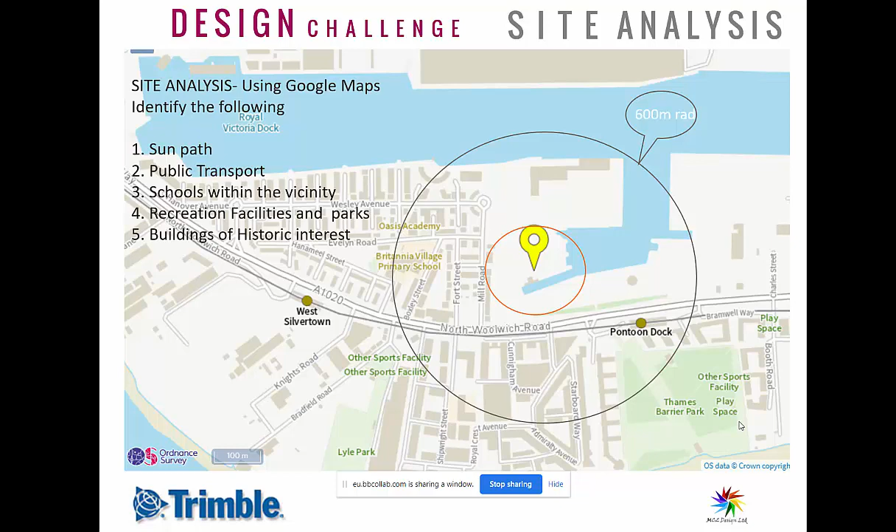Once we have those kinds of things, we can then start to look at the site in a little bit more detail. The site itself is somewhere in the region of about 2.5 hectares.

What happens at the moment is that within the site itself, we have the existing Silo D building. We have a canal that feeds that Silo D, and there are a series of access roads and paths within the site itself. So from the color coding on the screen, we've actually divided this up into 4 clear areas: site A, site B, C, and D.

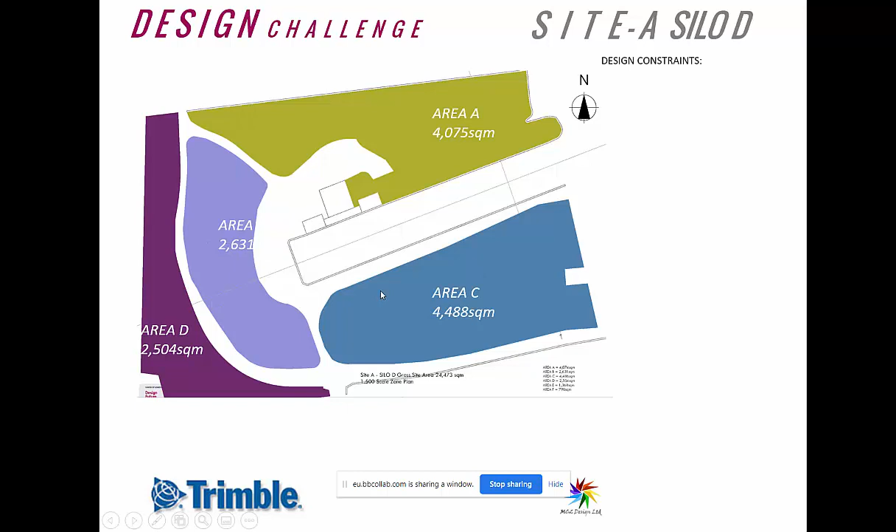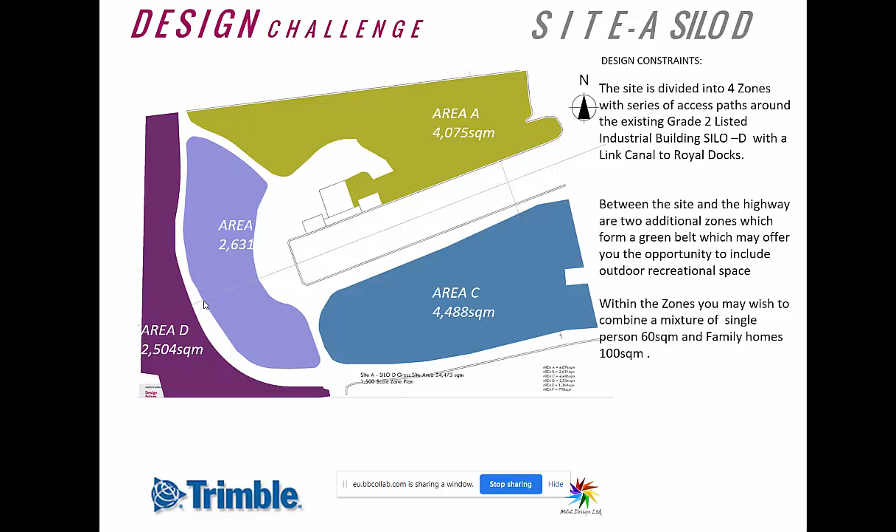Within each of those 4 zones, we do have the canal, and to the south of the site we actually have a highway. Now the issue is that because of the embankment between the site and the road itself, we need to consider how we will actually access the road when we start developing the site for our housing scheme.

But there are criteria of things that we need to think of. First of all, we need to establish what is the size of the homes that we need to put on the site itself. If we're looking at a design for a single person, we'll want to be looking at somewhere in the region of about 60 square meters. And for a small family home, we want to be looking at a minimum of 100 square meters.

When we're planning out the site itself, we need to think about not filling the site with buildings. We need to consider that only 25% of the surface area is going to be used for housing. The rest is going to be used for access roads, green spaces, and spaces that we can use within the community.

But probably the most important thing we need to think about is that this site is right next to the water, so we need to consider what's going to happen when we build this site regarding flooding, and the safety of the community that are going to live there.

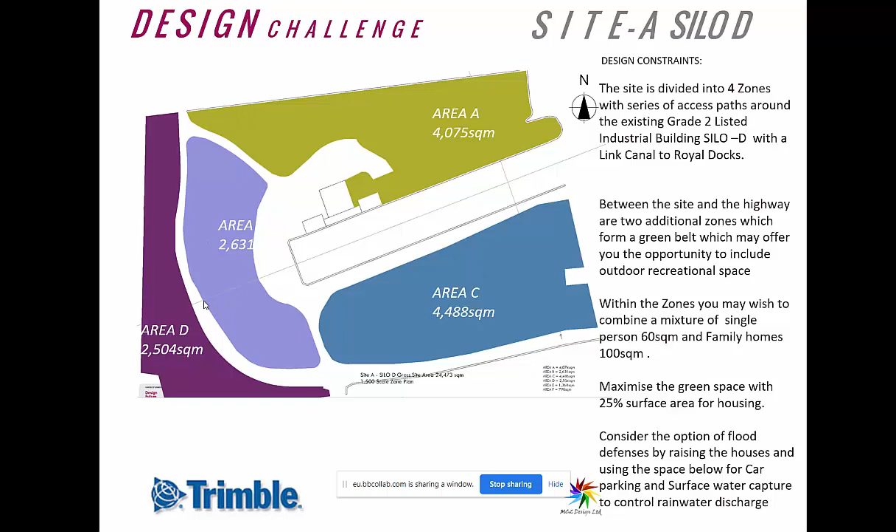Analysis of flood risks is available by going onto Thames Waterside. You can pull up an analysis, and it highlights exactly where the area of flooding is going to be.

Consequently, when we're looking at the flood risk, there are areas which are identified where flooding will rise. Now, at the moment, I think the current plan for flooding is about 30 years, and they are considering flooding rising up to 3 meters.

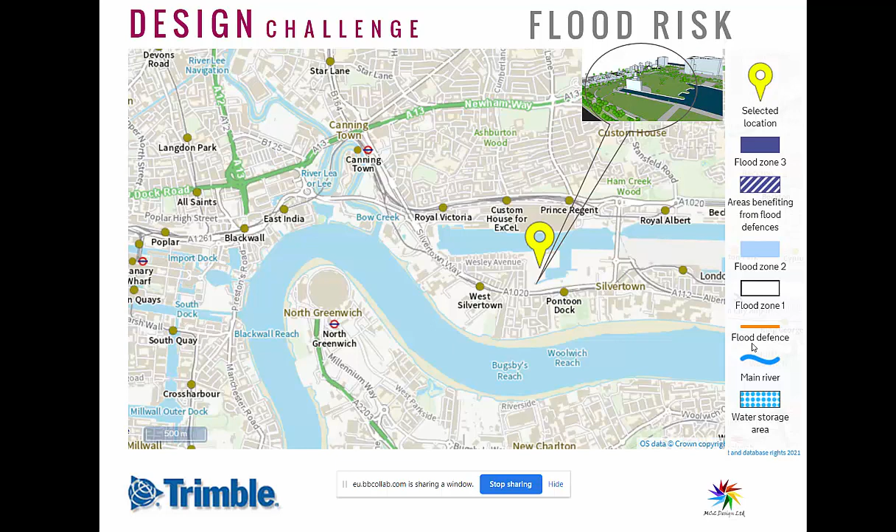One of the other things we need to consider is during the build phase of the site, how can we minimize the impact on the environment, particularly regarding construction vehicles coming to the site. Along here is the DLR, and here is the main road. Between the road and the site itself there is quite a high embankment, so it's not feasible to cut a hole there and bring site vehicles from the road. The only option is to bring it up this road and in from the north of the site.

That's one option. The other option we consider is building a temporary factory on the site, and then using a barge where all the components can be brought to site and assembled. This gives us a sustainable rationale where we can use modern methods of construction to achieve the outcomes for our site.

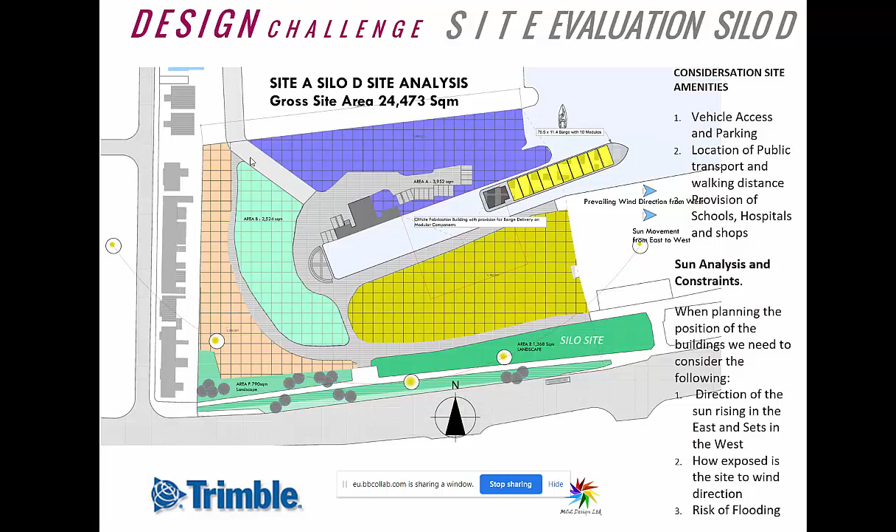The good thing about this site is that it's not an exposed site. As far as wind, a lot of you will have experienced high winds over the last two months, particularly in London last week. The vast majority of our wind comes from the west - probably around 75% - so everything comes from this side. Wind from the south tends to be warmer, and from the north tends to be colder. So we need to think about the orientation of our buildings and exactly where they will be positioned when siting them on the site.

We can use the ground and so we might consider building up the site about 2, perhaps 3 meters. Therefore, we can use the land underground as car parking, and we can use the level of the ground below our houses for storing water.

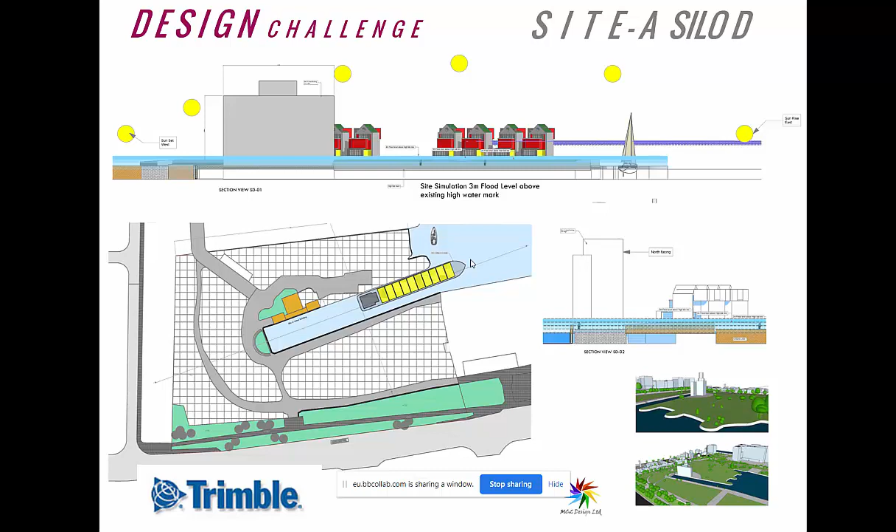This little sketch here is showing how I've laid this site out. I've created a series of 60 square meter homes, which are classified as single person homes. I've considered that we're going to have somewhere in the region of about 20 of those single person homes, each about 60 square meters.

We're then going to have a series of 2-3 bedroom family homes, which are 2-story. They can be created to sit over the top of them, so we're creating a three-story building. We can consider things such as inverted living, where we have the bedrooms on the lower floor and the living space on the top floor.

What inverted living allows us to do, when designing a house, is think about how warm the building is going to be. We all know that heat rises, so if we're only heating the bedrooms on the lower floor, the heat will rise. Therefore, the amount of secondary heating required to heat the upper floors is actually less.

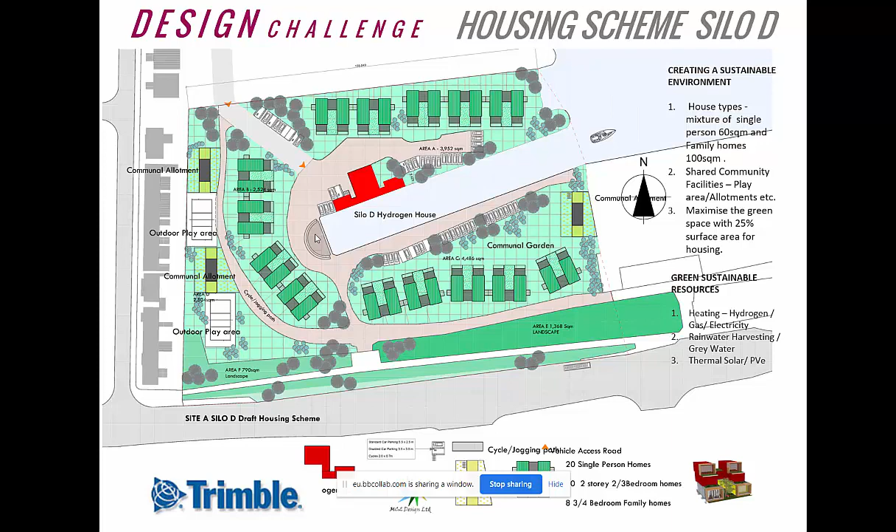I'm finishing today's workshop on a presentation regarding hydrogen in the homes, of how we can actually use hydrogen to replace the gas. And the factor is that because it's hydrogen, it has zero carbon emissions. Cost wise, it's not as costly as air source heat pumps, but at the same time, it is new technology. It's where we are going.

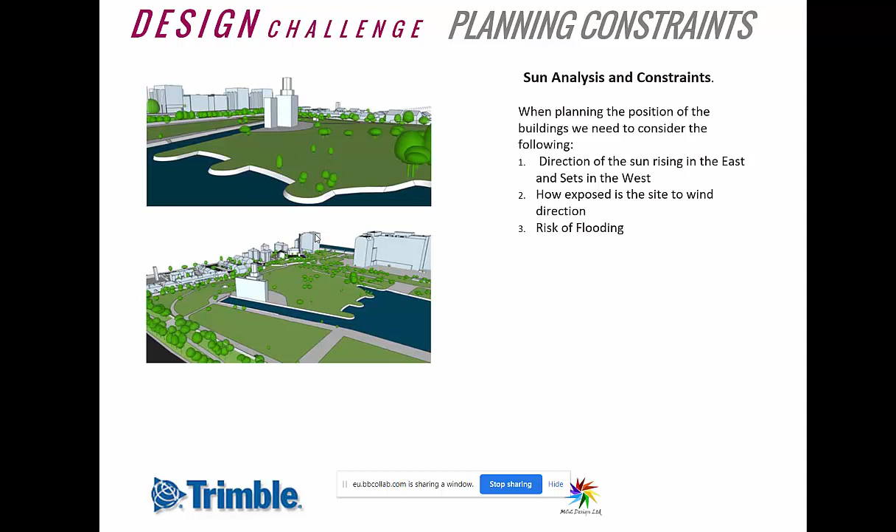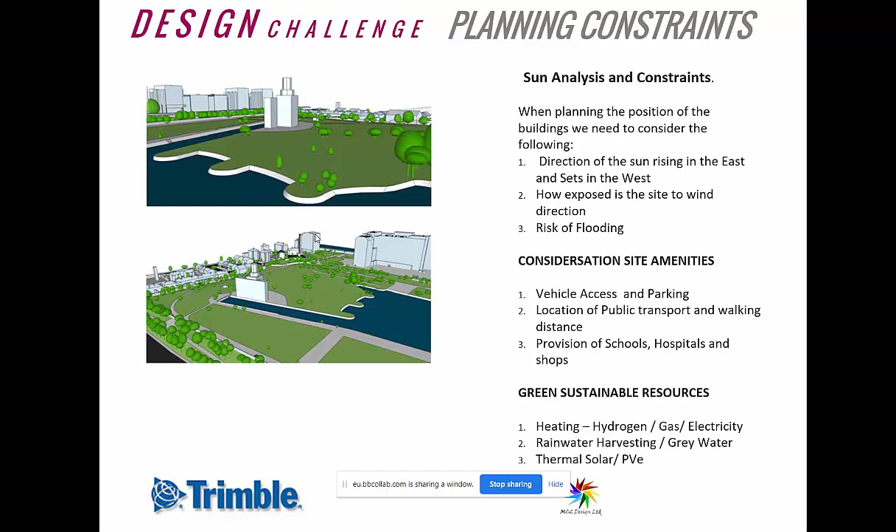So back to the kind of constraints. When we're looking at the site itself, we're looking at the sunlight. We need to consider the direction of the sun. We need to consider how the site's going to be laid out regarding parking and transport, and what sustainable resources we're going to use.

I talked earlier on, in the first workshop webinar that we did, about the Disability Equality Act 2010, and the factor is that when we are creating homes for the future - this act is 2010, so it's 12 years old, this isn't new stuff - the issue is very few developers are actually using it, and the DDA regulators are finding it very, very frustrating.

But there are key elements of the kind of things that we need to consider. So when we are creating a house for the future, we need to consider that it has a level entrance point, and it needs to have an area that is clear of any obstructions.

We need to consider minimum door clearances. So we need a door clearance, not a door width, because the width of the door is wider than what the clearance will be. We need to go for an 860mm clearance, so that people who happen to be in a wheelchair can actually use the property unaided.

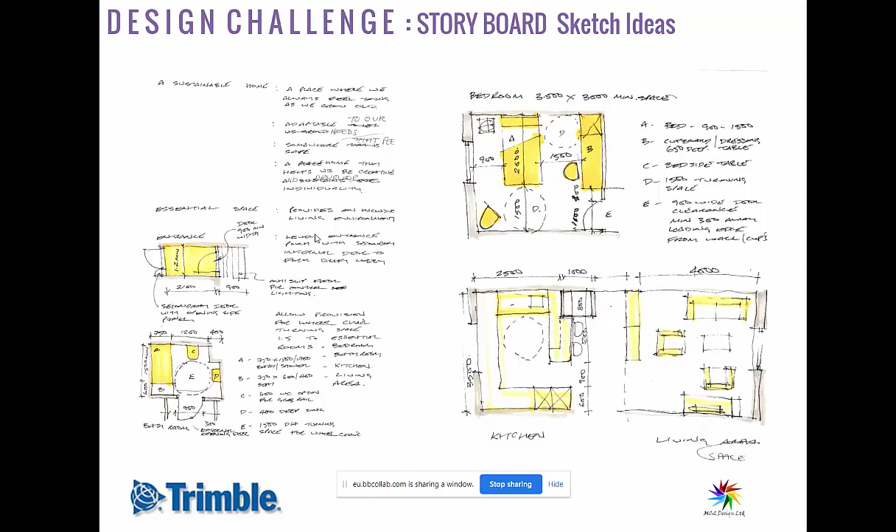Likewise with bedrooms - this is minimum space. We want to have a space where there's a bed with potentially room on one side up to 900 millimeters wide, but we need a space on the other side and at the end of the bed to be about 1.5 meters wide. And when you come into the room, we need to consider the width of the door and the direction of the door opening. By thinking of these kinds of criteria, we consider how much space we need within the design of our house itself.

So when we are considering the space itself, and start thinking about how that would articulate into a modular format, we can actually develop our ideas. Before we start going into any kind of 3D modeling process, we can actually define exactly what we're doing.

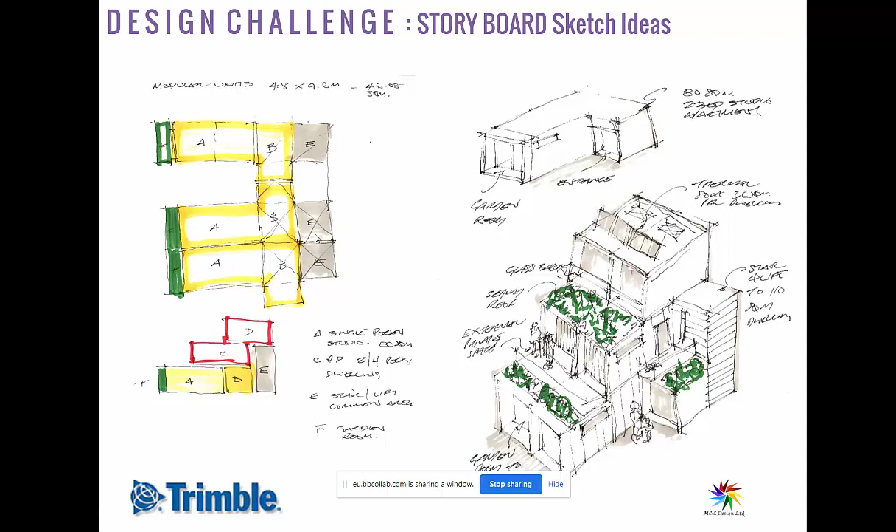So other things that we need to think about are inspirational ideas. The fact is that there are some really good examples out there that we can think about. So you look at my little tiny sketches that I've just done. Where's it come from?

This is design student accommodation for the Dyson Institute. Each of these modules was designed as self-accommodation for the students who occupy the site. They've been designed so they can be stacked upon one another, each given its unique individual space. The orientation of the buildings is set so they have private outdoor space, and they are set back so that they maximize the light while reducing the heat gains coming into the building.

Other schemes we can consider are houses on stilts, so the ground floor space can be used for car parking. It can also be used as a workshop for people to work from home. In this community we can have various artisans who work within the community and support it.

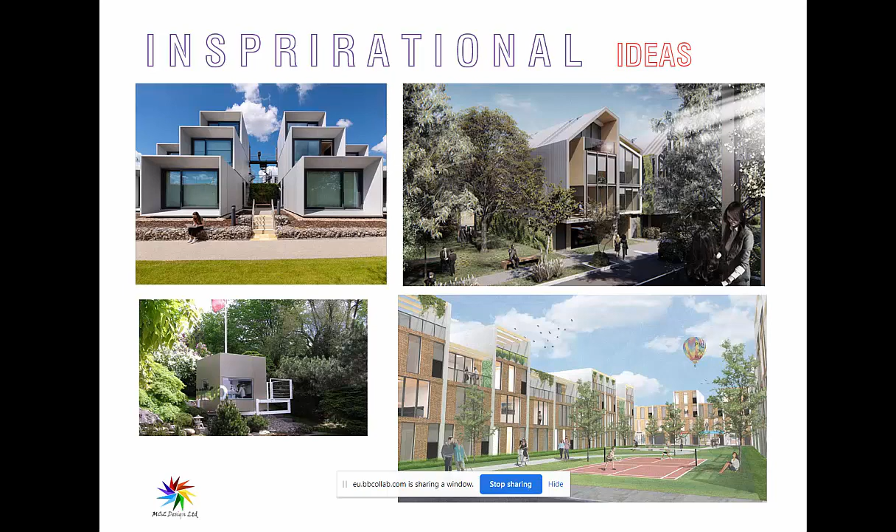And so it leads me to an important piece of reading, by a gentleman called Victor Papanek, Professor Papanek. He brought a book out in 1995 called The Green Imperative. It was republished last year, which I was so pleased about, because the Green Imperative talks about sustainability, about the kind of homes and environment we live in. But there's one chapter I'm going to highlight, chapter 9, called Sharing, Not Buying.

We're in a consumer society where literally we all have our own appliances: our own washing machine, our own dishwasher, our own TV, our own mobile phone, our own computer, our own cars, our own bicycles. But what's coming from this is what's classified as a disposable society. What happens to them when they get out of date? You can probably go around your own home and see how many appliances you haven't used for years. What do you do with them? Victor Papanek was thinking about why can't we consider, when creating our communities, having areas where people can share?

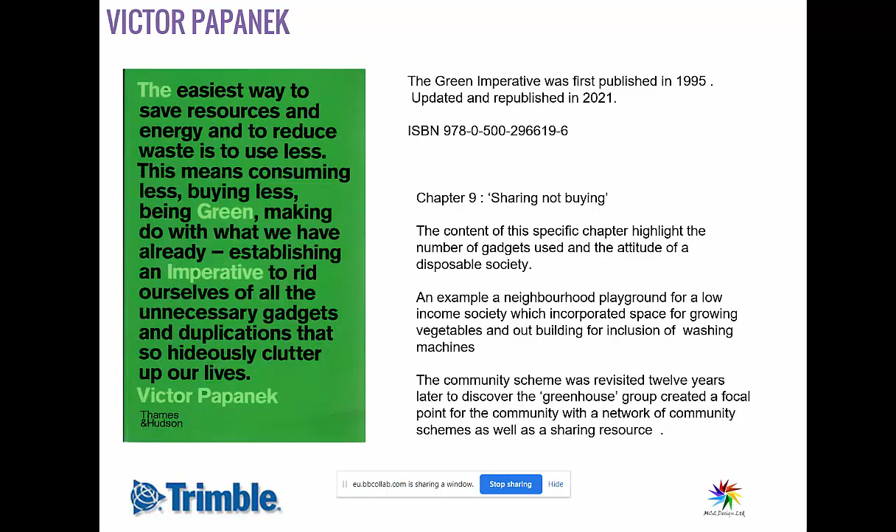I've put the ISBN reference onto there. The book itself isn't expensive, around £9 from Amazon, so it is a good read. I think when we start talking about sustainability, the Green Imperative covers a lot of salient points that we have forgotten about, and when looking at community, it's something to actually consider.

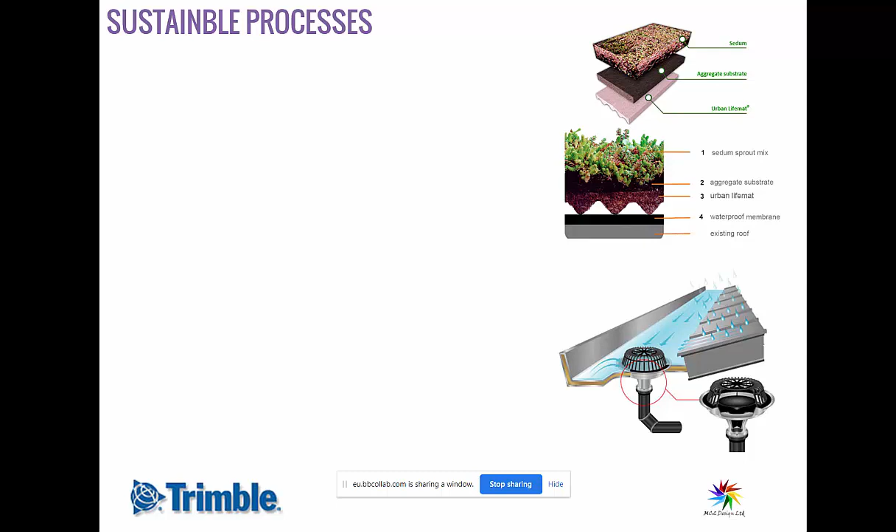Just going to wrap up with a few highlights regarding what we classify as sustainable processes. When looking at sustainable processes, we can carry out things and embed things within the scheme itself.

So, a sedum roof - what's sedum? It's a plant that grows in areas which don't require much rainfall. They do two things: they evaporate the water when it runs onto it, so we can reduce the amount of water runoff from the roof. Having a green roof on a building also absorbs carbon from the atmosphere. So sedum roofs are a positive way of going forward.

Other things that go with this are siphonic drainage. This gathers the water that runs off our roofs and feeds it into a gravity system, which can control how much water is running off. Consequently, we can use that water for rainwater harvesting, and there are certain things we can do with it.

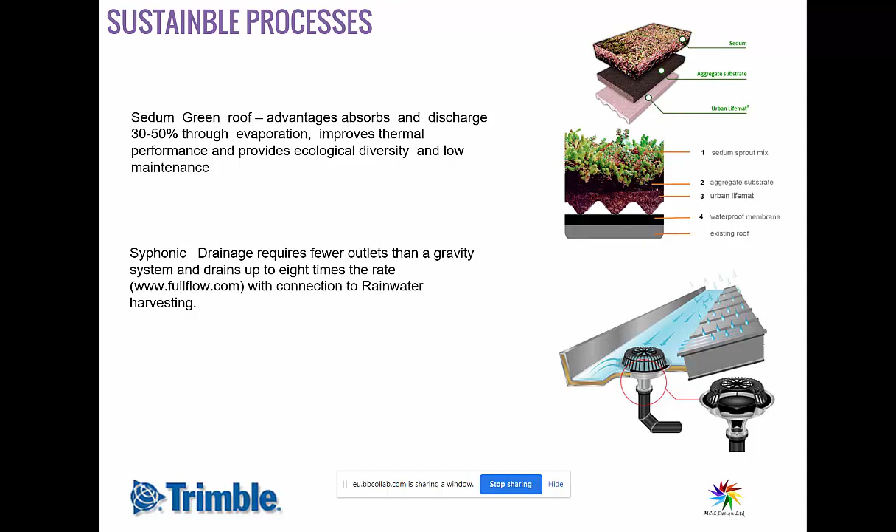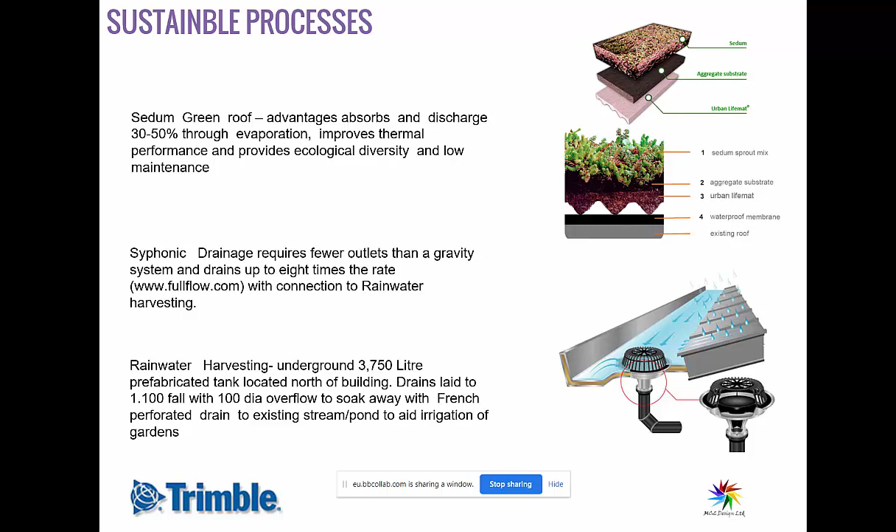By considering something as small as a 3,750 litre prefabricated tank located north of the building, it can be laid within the site, and any excess water from the tank can be managed accordingly.

In 2020, the European Commission spent 1.5 million to fund city trees across various European cities. The idea was to create carbon capture using moss walls. I've included a link for the moss walls and added an illustration explaining it, which hopefully will give some inspiration as to what moss can do and how we can incorporate this into our buildings and designs for carbon capture.

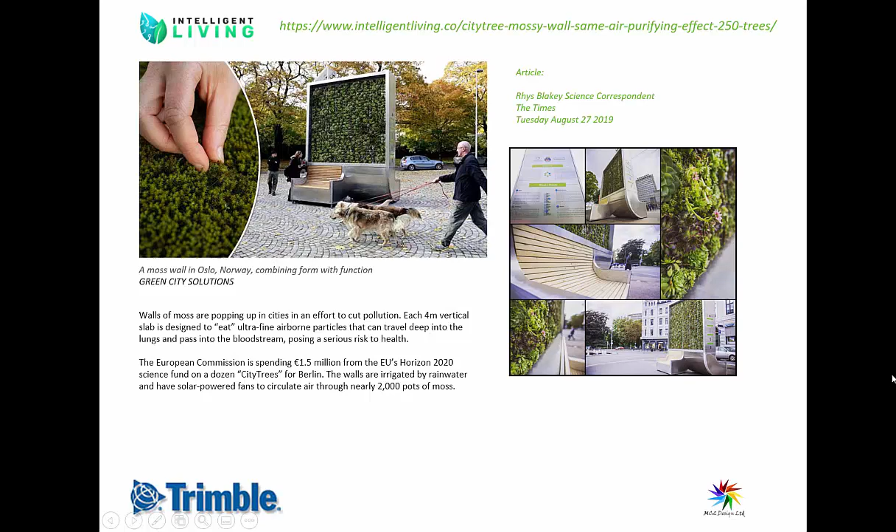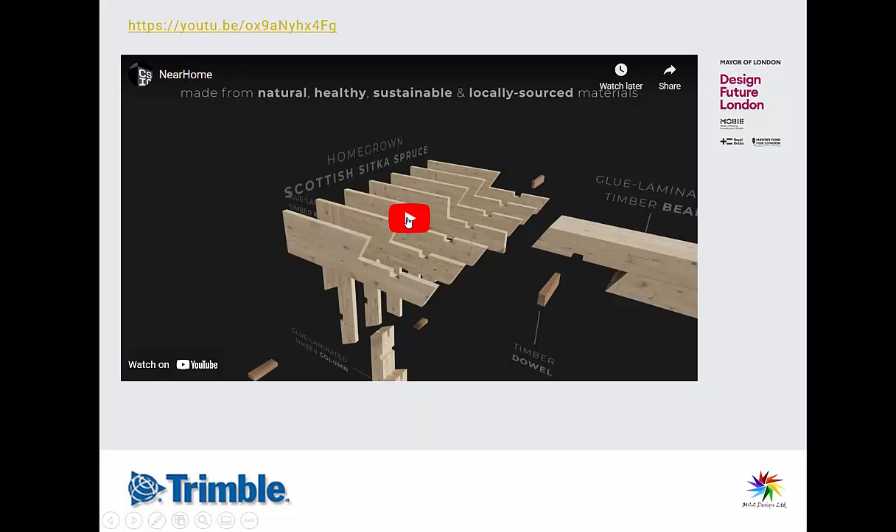Here's a little tiny video created by Carbon Dynamics for the homegrown Scottish project, using Scottish timber. The video is about 3 minutes long, and it tells you a little bit about off-site construction and the methodologies which are applied.

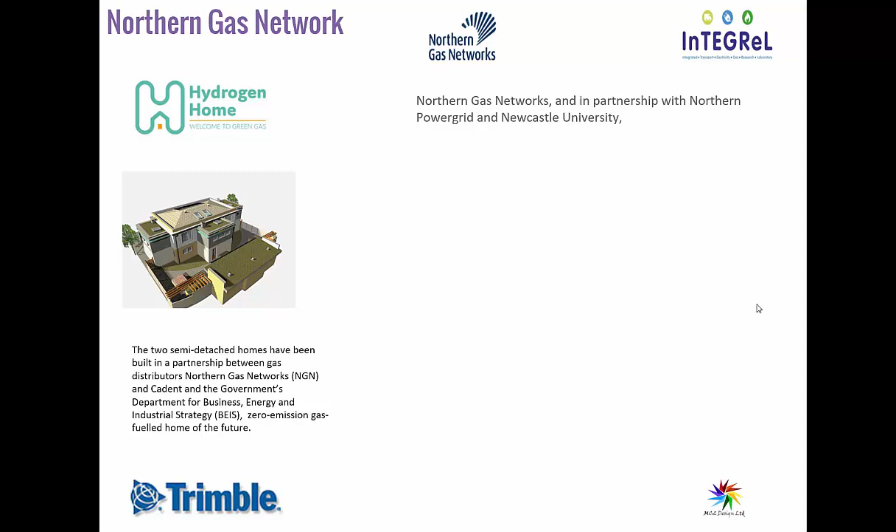This video takes you through what Northern Gas Networks are doing to create hydrogen homes. They've created a research site which was opened 2 years ago, and they're about to go live, putting hydrogen into 2,000 homes just outside Newcastle. They've also got a 5-year plan to expand the system into cities such as Leeds and other cities around the UK.

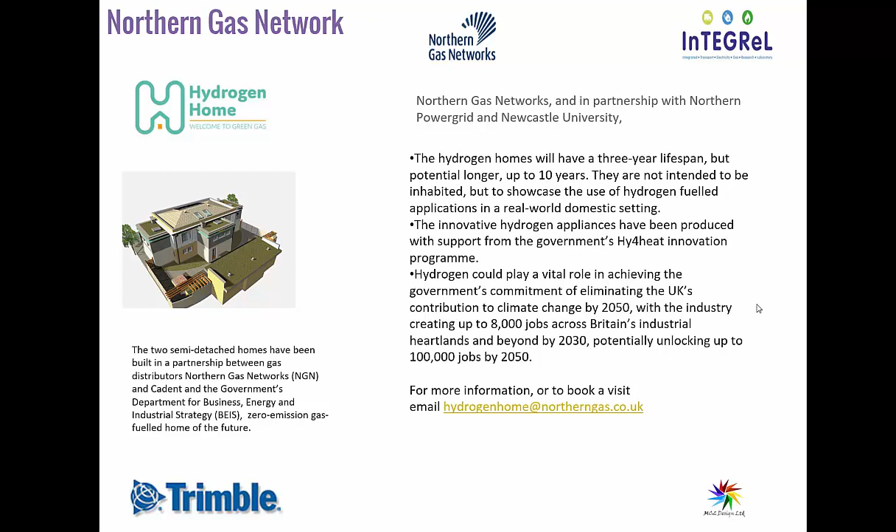So it does offer us a viable option, whereas ground source heat pumps are fine if you're in a ground floor flat, but if you're on a fourth or fifth floor apartment, it's rather impractical. But let me play the video and let you make your minds up. I've had a look around these hydrogen homes, and personally I think it's a good, viable proposition.

The UK energy sector is facing a time of unprecedented change. With growing populations, rising bills, and our desire for greater flexibility in the way we heat our homes and power our vehicles, it is a fast evolving landscape. But there are also significant challenges ahead. The Climate Change Act requires an 80% reduction in carbon emissions from 1990 levels by the year 2050, and this forms just one part of the energy trilemma, a formidable conundrum.

What we're trying to do is solve 3 really difficult problems simultaneously: how to have an energy system that is secure, affordable, and sustainable, i.e. low carbon. Trying to solve one of those problems at a time would be difficult, but trying to solve all 3 together is incredibly difficult. It's one of these problems people call a wicked challenge.

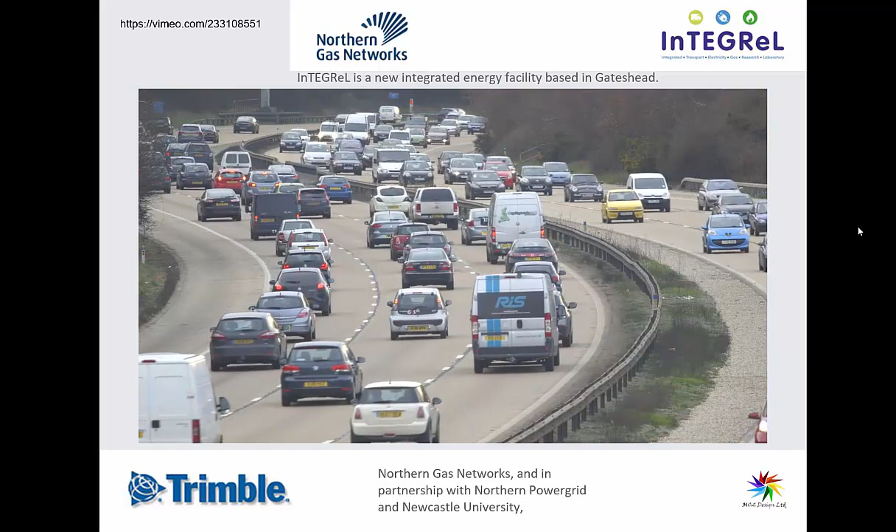Increasingly, both industry and academia believe this challenge can be best addressed through collaboration between the UK's different energy systems - gas, electricity, renewables and transport - working together. If we do what has been done for previous decades, looking at just one aspect of the energy system at a time, we don't really see the whole picture. So what we're trying to do is take a whole systems approach that discovers the insights around the interdependency between different aspects of the energy system.

Traditionally, we ran an electricity network, and we ran a gas network, and we had a transport system. I think we all owe a duty to get that system working together in a holistic fashion, in a way that delivers the best value for customers, but also delivers the social and environmental outcomes we want.

To facilitate this, Northern Gas Networks, working in partnership with Northern Powergrid and Newcastle University, has created InTEGReL, the UK's first whole energy systems research, development and demonstration facility. The InTEGReL site will provide a testing ground to help understand interdependencies between heating, cooling, transport, gas and electricity, and how we can combine existing infrastructure to deliver clean, affordable energy solutions that meet future demand.

The InTEGReL initiative is really about bringing gas, electricity, academia, small businesses together in quite a unique way that hasn't really been undertaken in the UK before. If we bring the 2 energy sources together, then we've probably got a great solution to decarbonise the UK.